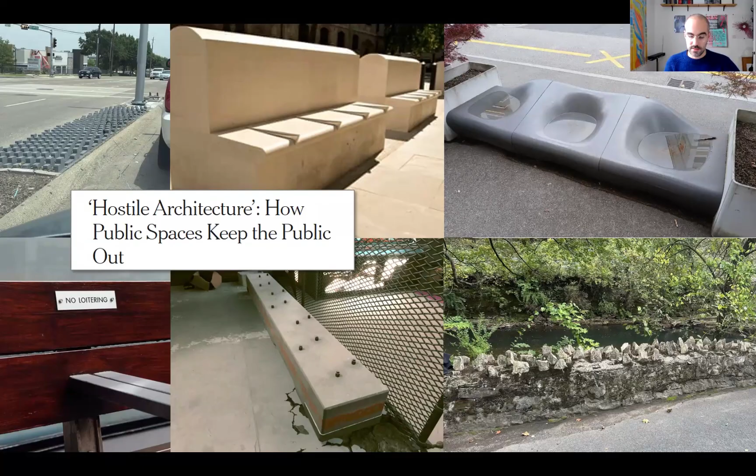On the top left are anti-panhandler devices, and anti-skateboarder devices on top; this is a clip from a New York Times article that I thought was quite good. User experience design at its worst, but very much user experience design—thinking about how every design decision affects the life of the people we're designing for.

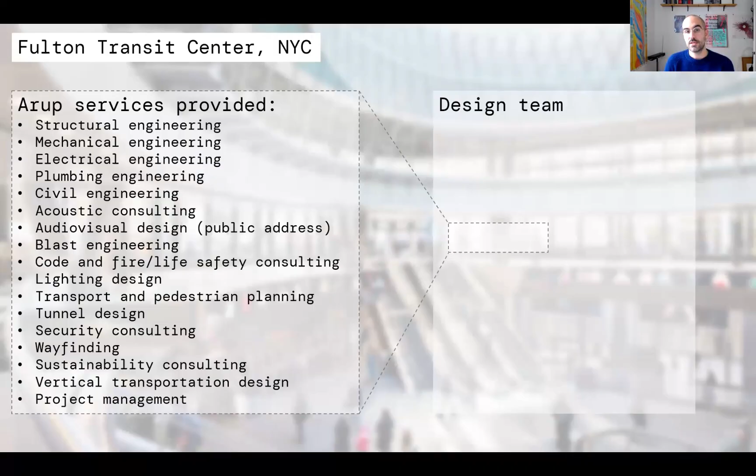Back to the transit center. This is the list on the left of services that Arup provided, which is only one part of the design team—there's a bunch of other technical disciplines involved that all have to coordinate and iterate with one another internally, among the Arup disciplines, but also with other designers on the project.

I see the building design team as a complex system requiring careful oiling and coordination. Typically that's the job of the architect, who federates all that coordination, and needs to know enough about all these technical things to understand how it all clicks together and report to the owner or stakeholders.

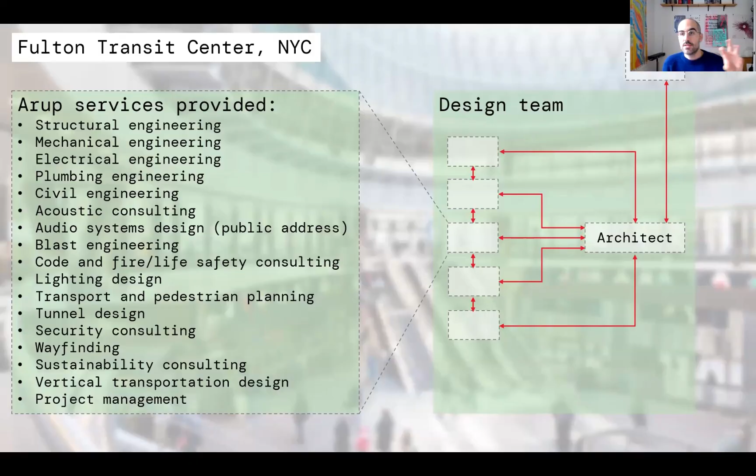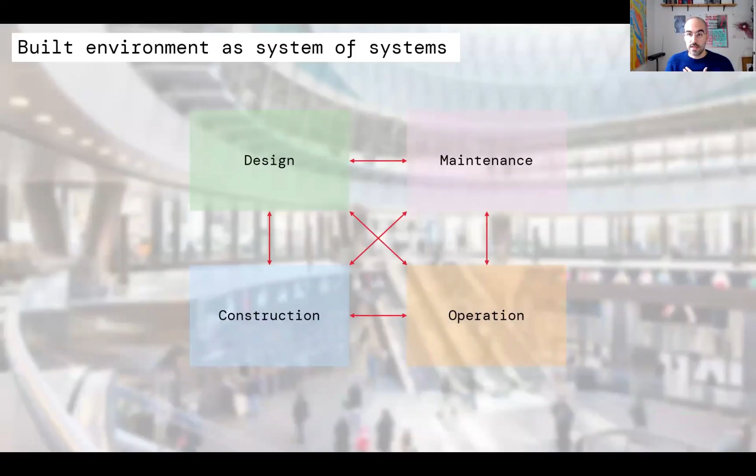And that's just the design team—we have other teams that are their own systems. We're starting to see a system of systems in the built environment, because the design team is only one of the systems involved, and all those systems need to talk together to feed into one another to create this, the Fulton Center seen from outside, but also how that fits within the other systems around it. It's like a fractal model of systems in that sense.

Which leads me to my favorite Jenny Holzer quote: all things are delicately interconnected. It's so good you can get it as a T-shirt at Mass MoCA. I did look for the T-shirt that I bought, but I couldn't find it—I think it shrunk or something.

So, speaking of Jenny Holzer, and this is the first in a series of questionable segues in this presentation, but I hope you'll forgive me.

I'm going to use this to go into a few projects I worked on over the years. This was at the New York City AIDS Memorial at St. Vincent Triangle in the West Village. It's a light and sound installation. Jenny Holzer, before our involvement, designed the Walt Whitman poem engraved in the stone on the ground. It reads historical texts and poems related to the AIDS epidemic, but also reads people's names throughout the day of those lost to AIDS from the 80s till the present day.

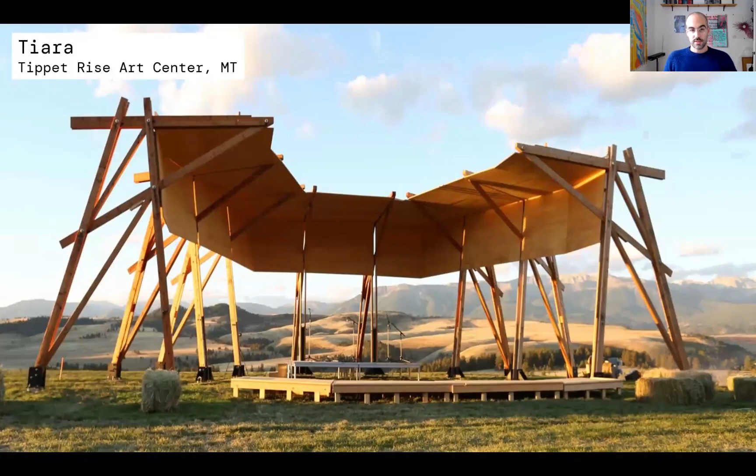This is one of the first projects I worked on at Arup in New York. This is in rural Montana at an art center, kind of like a giant land art center, Storm King on steroids, that also has advanced musical programming, called Tippet Rise Art Center. It has breathtaking views of the Montana landscape. I've never seen something more beautiful in my life, actually.

And we designed this. I can stop, yeah, anytime. Yeah, we designed this.

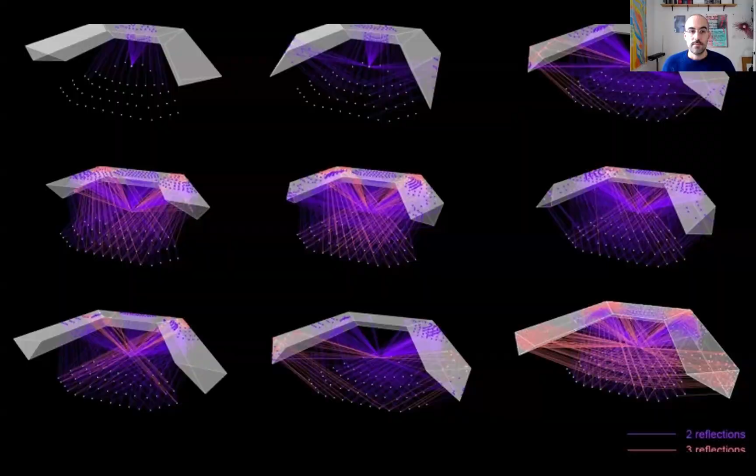Performance shell, a timber performance shell, and the goal was to optimize the acoustics for the audience without compromising the view. For that, we used a 3D optimization algorithm in Rhino and Grasshopper, using ray tracing approximation for early sound reflections, trying to maximize how much sound energy would go back to the seats without blocking the view. Worked on Public Records after that, did the acoustic design for the first sound room at Public Records. I'm going a little heavy on the sound stuff because that's how I started.

Some of those acoustic projects at Arup are supported by this room we call the Sound Lab, an immersive acoustic design tool where we can create, recreate, or simulate acoustic environments from other locations around the world, or things that are not built yet. There's generally one in every office where we have acoustics, so we can have interoperability between the content that way.

More multimedia pieces. I did the soundscape design part of Arup's general contract doing all the AV design for the Salesforce lobbies in San Francisco and New York. There's a multi-channel soundscape inspired by the Redwood Forest.

This is an exhibit about the life and career of Lou Reed at the New York Public Library for the Performing Arts, three years ago. The exhibit was bigger than this, but we designed this listening room with an Ambisonics multi-channel audio system and multi-channel video playing back some unreleased backstage material, among other things.

I'm sure you've heard of this project. Arup did the full AV design for the Sphere - the bowl, the atrium, and some of the auxiliary spaces. I love telling this story because I worked on one part of the audio system that I hope you never get to experience. I worked on the emergency audio evacuation system for the bowl and the atrium.

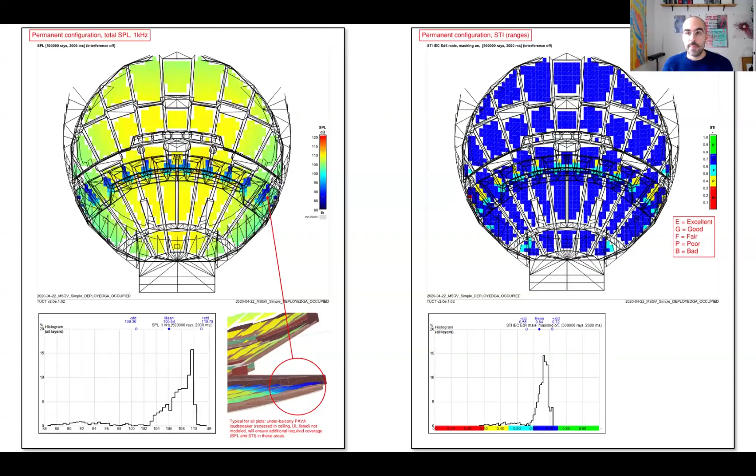There's other examples at the station where things have not been well coordinated, but I'm not going to get into that. But to tie it back to UX design.

I think all those disciplines we talked about earlier are at the service of UX design, but in fact they're not in isolation. Lighting design is UX design, of course, but in this particular context it's a multi-layered design approach that is UX design.

It's the careful orchestration of all these design specialties that constitutes, in my mind, experience design in the built environment. The same way you would assemble ingredients in specific quantities to make a recipe, you could take a pinch of acoustic design and a cup of structural engineering, and poof, you get the Fulton Center.

I'm going to talk about some projects. This is the new Terminal 1 at JFK, where Arup is leading the design and delivery of the cultural program.

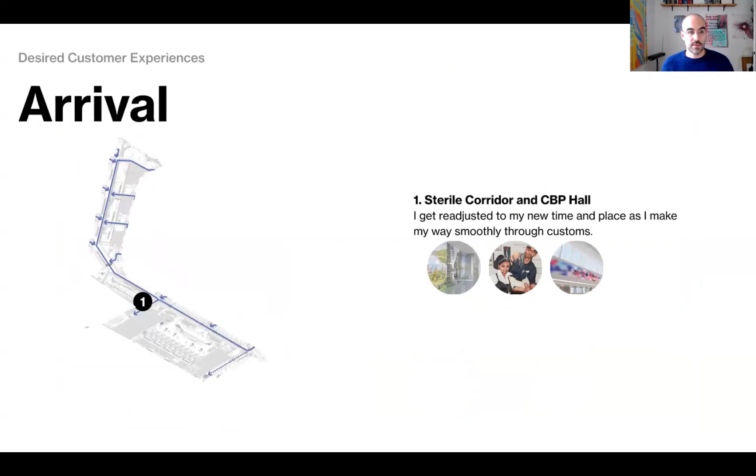I'll get into one piece I can share in detail, which is a collaboration between Arup and Pentagram in the departures hall. We call it Leaving New York.

The corresponding digital piece overhead, which we call the digital ribbons, emerges out of the architectural finish that's there, and cycles through ambient skies throughout the day that correspond to the scene displayed on the split flap display. So this Leaving New York experience is, we hope, delivered in a synchronized and holistic manner to the passengers as they make their way through security.

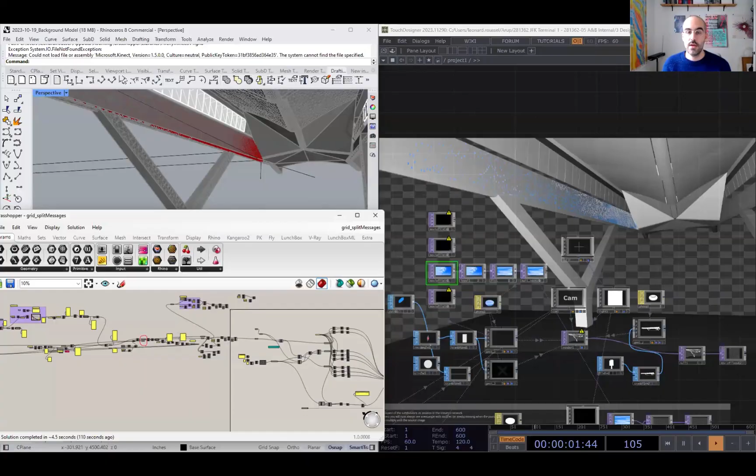You'll find more info online about descriptions of all the pieces they've commissioned, but we can't share visuals just yet, unfortunately. Look them up, their work is amazing. It's mosaic, painting, and sculpture work, and it's going to be peppered throughout the whole passenger journey.

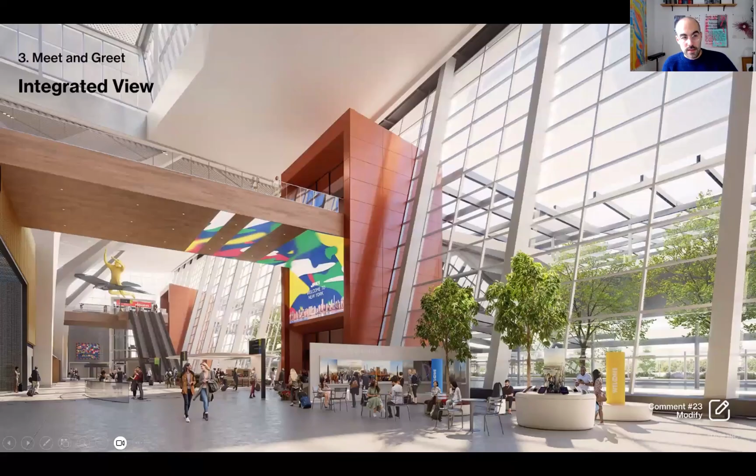This is one rendering of the meet and greet area with two massive pieces of hanging art. This is a placeholder, not what it's going to look like. But on both sides of the exit door, where there's going to be an anamorphic display welcoming people onward to their journey in New York, there will be those two big pieces of hanging art.

The digital experience was designed and is now produced by Gentilhomme, in partnership with the CMS designer and programmer. Then there's another slew of disciplines that Arup has been recruiting and expanding across the last three years. We've been recruiting people from the structures, lighting, and electrical teams to help us take this design to each next phase.

They're helping us a lot with permitting with the Port Authority, who we're responsible to as well, and who is basically the landlord of our client, JFK New Terminal 1. JFK New Terminal 1 also has a team of fabricators and builders who are going to build the program that we designed. But it's important to know that we're completely separated from the base building design-build team, and our stuff will fit in their building. I think that's an interesting nuance, which is not always how it's structured.

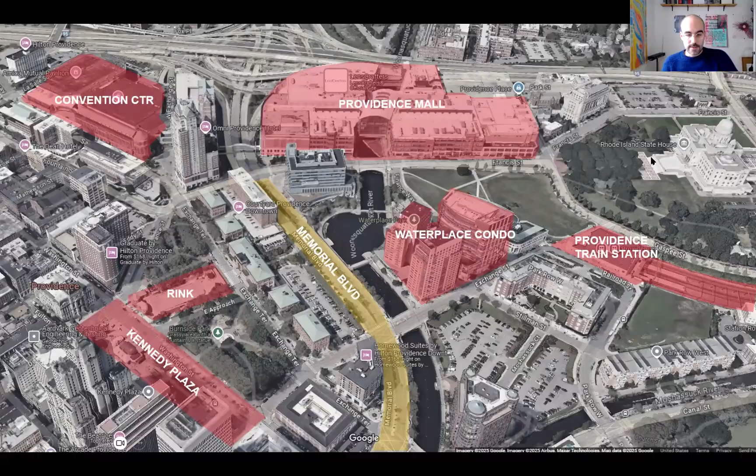Here's a little overview of our site. I'm going to scrub through a little faster. Just a little drone shot gives you a sense of scale. I think it's quite a nice video. Yeah, so it's a beautiful area at the heart of the city, really.

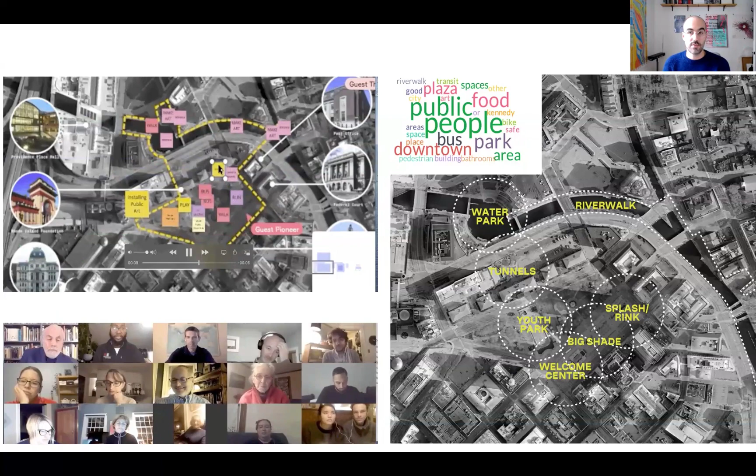And our experience design work—the remit, again, is to revitalize the area. So what does that mean? Our experience design work began with a series of interviews and regular meetings organized by the city with us, to collect people's opinions and ideas about how they experience the space, how they want it to change, and what needs to change. We were able to develop a series of user types that helped us put together the frameworks of the user experience and solidify the user experience goals for the site.

The idea, of course, is to make this framework as broad and intersectional as possible. By doing this, we can collect people's insights on their experience of the site, and their responses directly inform the design concepts we put together, as well as some of the parameters that will drive the rest of the design.

Another tool we use for user research is mapping observation surveys, you could call them—going super precise and high-res on what people are doing on our site. So: a man sits on the bench for 15 minutes, walks around, runs alone, vomits in the bin, and then leaves—this kind of stuff.

Figuring out what people actually use the site for is incredibly important, especially since some of our team is local, but I'm not local and I don't come to this site every day. So it's harder for me to understand what the site's actually about without these tools, made with our local community engagement partner.

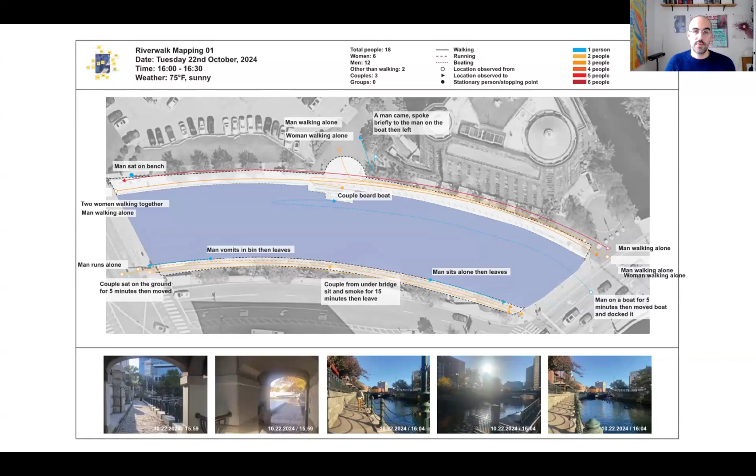It's not visible from the street. There's no intuitive access, and that's kind of where we come in. That's why the city hired us—to bring people back to this area.

So people have described it as being a non-place. It's known to be a heat island. There's a lot of hard surfaces. It's not easily accessible. It floods regularly, and there's low visibility. People feel unsafe going under the bridges.

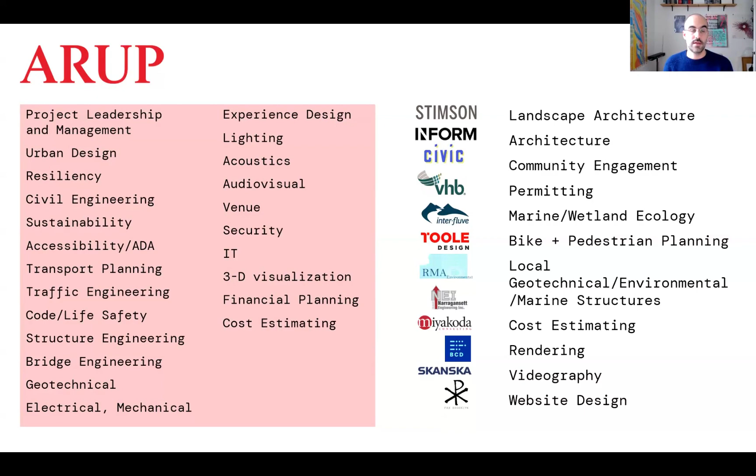I think this is where the experience design team comes in, to set the tone and generate the overall narrative that the design is going to have to respond to. And so to do that, we had to zoom out and move back.

We looked at basically the largest timescale we could possibly imagine on this site, and what it meant to look at this before Europeans settled in the area, but even before humans were in this area, before even life itself. We're looking at a series of concentric timescales here that are our entryway into relating to the environment on a temporal arc that existed long before us, will exist long after us, reinscribing the site into a meaningful framework there. And so the dynamics that govern elements and life on this site are a system.

Did you guys see this thing? I should have. Okay. Do you guys see those notifications? I want to turn that off. I apologize.

Right, so those timescales are geological, the biggest sort of low frequency arc we can imagine. But then if you zoom in, human fluctuation throughout, like human eras, seasonal throughout the year, like fish flowing upstream, or leaves turning, etc. Things that happen monthly or daily, like tide movements, or even subdaily. There's a lot of life going on at a microscopic level, with a lot of activity happening at super high frequency that we don't even perceive.

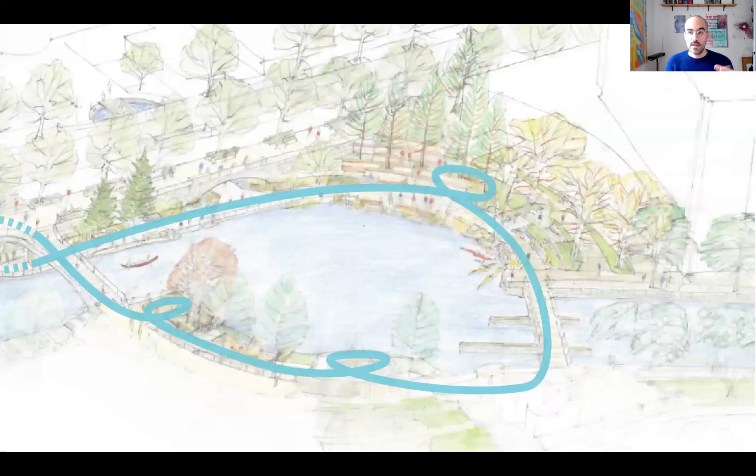And the way we do this is developing this narrative and how it articulates itself into all these themes here that are around natural history, but not only. This is the product of our historical research that articulates itself into a framework of 8 themes, and the goal is that all these become physical manifestation. This whole thing ties the site together as one thread, and elements around the site are physical manifestations that emerge out of this thread to create meaningful user touch points in this built environment. In a nutshell, it'll manifest itself particularly in these components of the design and the programming.

So including but not limited to, a series of meandering paths, restoring the porosity of the site, the accessibility to the site, connecting it to the wider urban trail network. There's the Woonasquatucket River Greenway on the west, where there's a lot of mixed-use paths with bike lanes and much more intense connection to nature over there. We want to connect to that.

Bioremediation solutions and introducing, or rather encouraging, recruitment from shellfish and other species to clean the water, because this was a polluted waterway for a long time because of all the industries that used to be implanted around there.

The Meeting Waters framework is going to infuse the architectural expression around the site, the landscape. I want to talk particularly about the elevation of the river walks.

There's... I don't know if I have a slide about this actually. I have a visual of, oh, here we go. This is what they call the 10-year flood event, like the biggest flood event that happens on average every 10 years. But what this is going to become in the 2050s and 2070s with sea level rise. This is more or less where we're headed, which is quite dramatic.

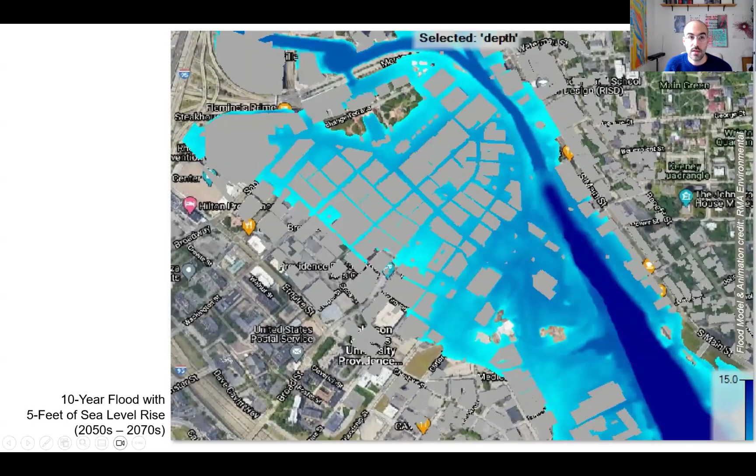But the goal, if I go back to my slide here, elevation of the river walks throughout is part of the plan for sure, to make sure it's resilient for those waters rising. Interpretive signage that we're designing, some little DIY gathering spaces supported by AV technology, so people can really

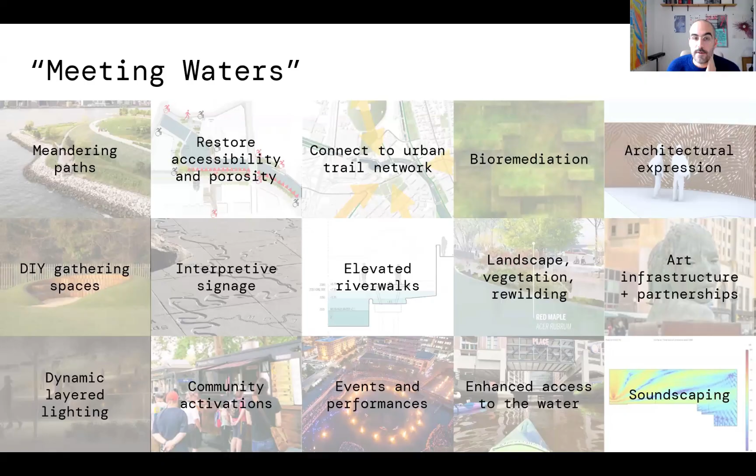appropriate the site and make it their own, schedule their little yoga class or poetry reading or whatever the case might be. A very extensive, dynamic and layered lighting program that's going to tie the site together. A lot of opportunities for events and performances, community activations, et cetera. Soundscaping is another one. So that's all a series of the main things we're touching when we're designing the site.

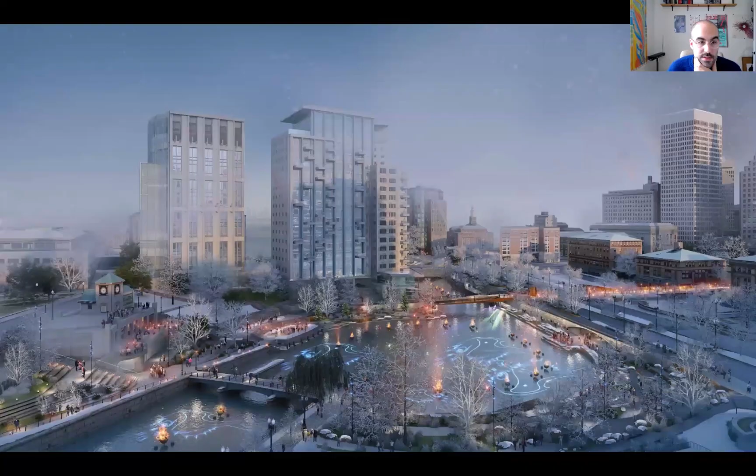Here are some drawings by our landscape architect, Stimson, that I thought were quite pretty, looking south and looking north. We're sort of deep in design, so all I can share really is renderings at this point, but you can see some of the changes that are going to be brought to the area, particularly on this slide with the elevated river walks here that I was just talking about.

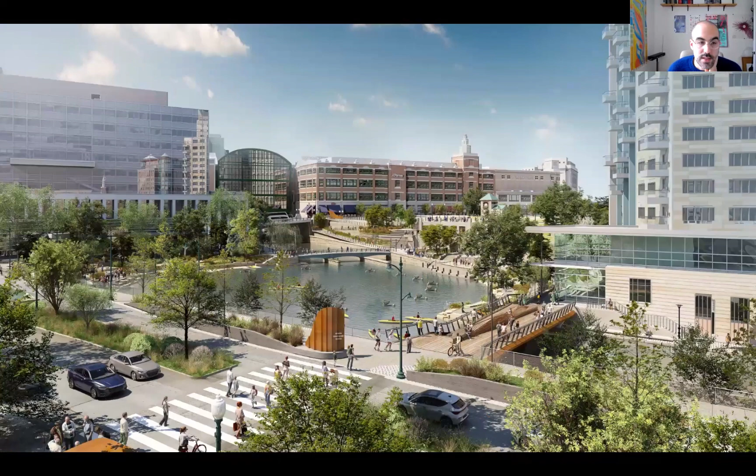An entirely new bridge is going to be built here, designed by Inform, our architect partner. And a whole other series of experiential things around the site that hopefully will bring people back to the area. I'm going to finish talking about a personal project of mine.

So this is outside of Arup. I'm part of an artist group called Collective Scope, and our work is about our collaborative relationship with different kinds of users in the built environment, the non-human, or what we call more-than-human agents, and more particularly the microbial populations of the Gowanus Canal in Brooklyn, which is much like the Woonasquatucket River in Providence, a heavily polluted tidal estuary, suffering from the same symptomatic sort of industrial revolution consequences.

Elizabeth Henaff, one of the members of our team, is a professor at Tandon School of Engineering at NYU, and has been studying the microbial systems in the canal for over 10 years. Her research has demonstrated that the canal, which is often seen as very dead, is actually full of life. But not only that, the microbes have evolved to develop functions to actually metabolize and remediate the toxic waste that we left in the canal over the past 150 years.

And so it comes at a particular time where the canal is being dredged, and this remediation activity is going to be halted and capped with concrete because it's been rezoned, and there are fancy condos that are going to be built on the site. So the product of about 150 years of evolution is suddenly and very violently being brought to a halt, just as property value is skyrocketing next to it, and the canal has long been declared a Superfund site by the EPA.